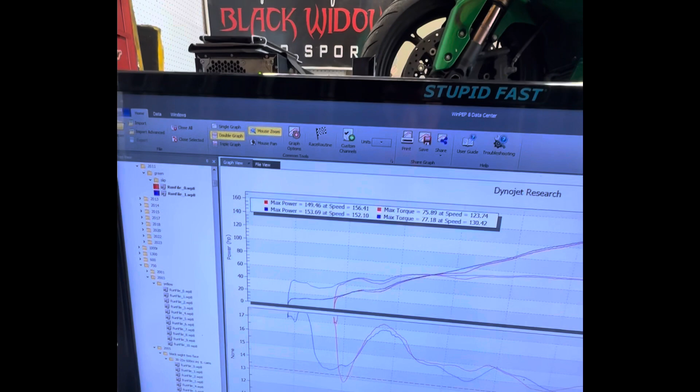Starting off the day at 153. That 149 was the previous pull. She's cleaned it up a little bit.

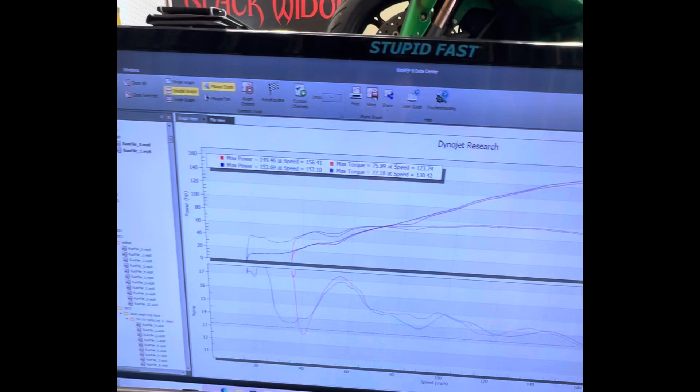Eventually she picked up some fuel in that spot just from giving her another hit. Let these injectors clear out, just cleaned them up and ran them through the sonic cleaner. Get this thing back to running the way she should.

So now that we got a baseline starting point, we're going to get to tuning, and we're going to tune this on both gasoline and E85.

Ooh, looks like we got some fork seals that are leaky. Got some lube on the chain.

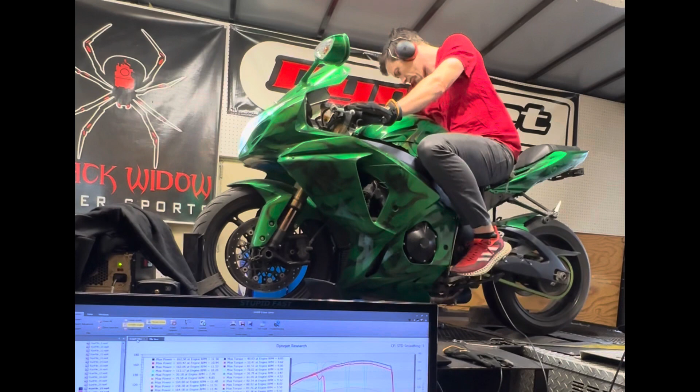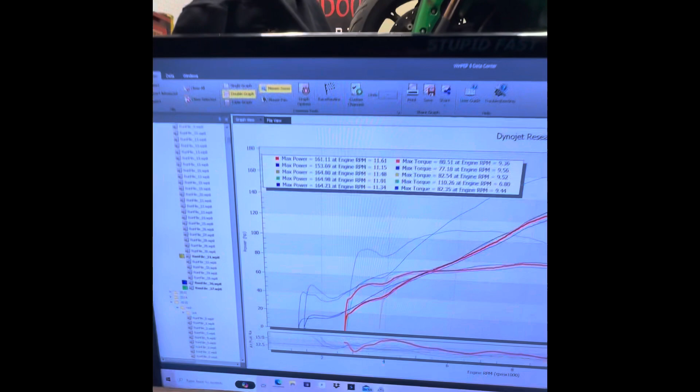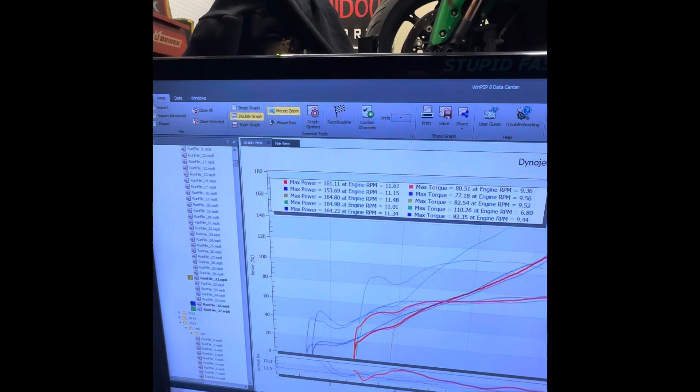Alright, that was our best E85. We made 165 on this with 82.5 foot-pounds of torque, compared to starting off at 153 and 77 foot-pounds of torque, and on gasoline we made 161.

We still got some more work to go back to gasoline. We went straight to E85 on this. So we got to see what modified velocity stacks and bigger throttle bodies did on this one.